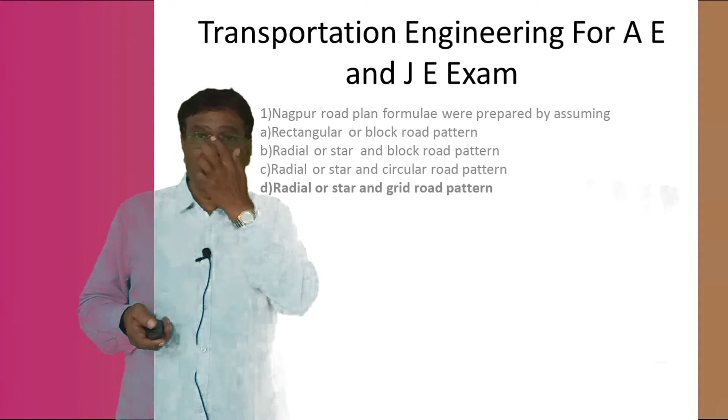I got total teaching experience of about 36 years, and for this whole period I have taught transportation engineering. My specialization is MTech transportation engineering from NIT, National Institute of Technology, Tiruchirappalli, Tamil Nadu. I am not praising myself, but I am very expert in this subject. You can ask any questions from any angle in transportation engineering.

My boys, don't be scared that it is only objective type. My questions and answers are not only telling the right answer, but side by side I am going to give you the concept, why this is the right answer. For example, in question number 1, why D is the right answer, why not A, B, C. With that I am going to give you the whole concept of

transport engineering, so that if any other questions are asked in this particular subject, you should be able to answer. Okay, let's go.

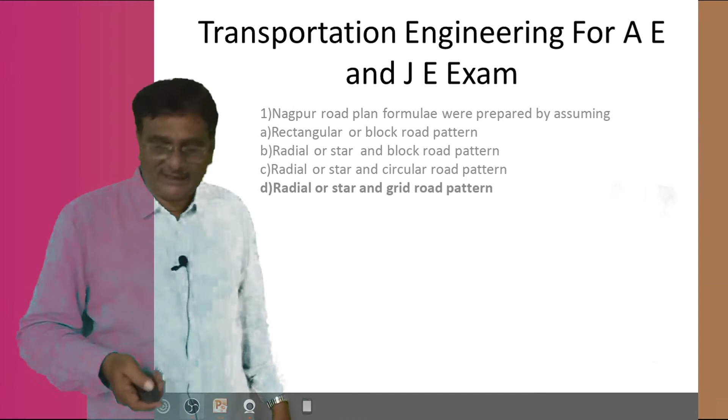There are 4 answers, 1, 2, 3, 4. They are all different road patterns, my boys. Now he is asking which pattern is used in the Nagpur road plan formula. Answer D is the right answer, the radial or star and grid pattern is used in the Nagpur road plan formula. Coming to the next.

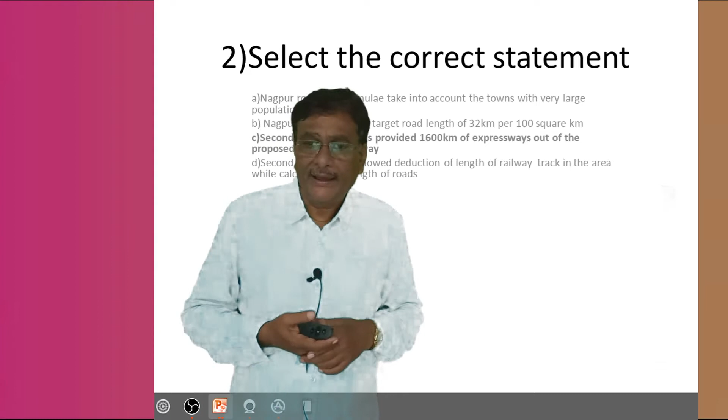Now coming to the second question. Nagpur road plan formulae take into account the towns with very large population. Understand or not? The question is very simple, try to read. Now there are 4 statements. Among the 4, which is the right statement?

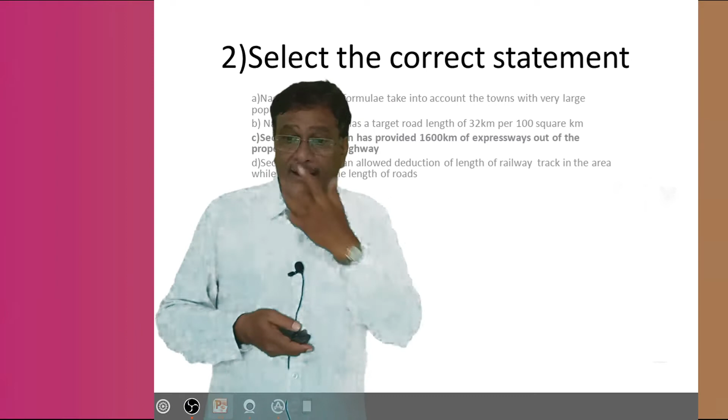There are 4 statements given, A, B, C, D. Which statement is correct? I read the 4 statements. A: Nagpur road plan formulae take into account the towns with a large population. B: the Nagpur road plan has a target road length of 32 kilometers per 100 square kilometers. C: the second 20-year plan has provided 1,600 kilometers of expressways out of the proposed national highways.

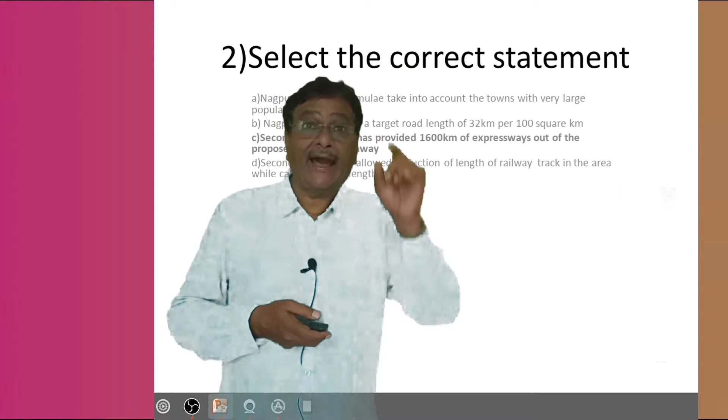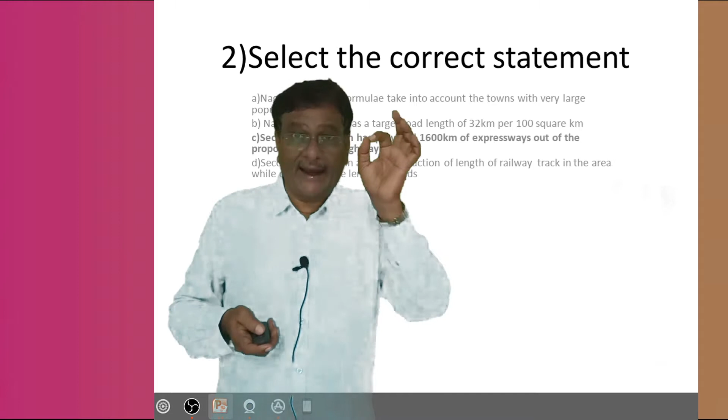If you look into the second 20-year plan, which is called the Bombay Road Plan, the second 20-year road plan has added 1,600 kilometers of expressway out of the proposed national highways.

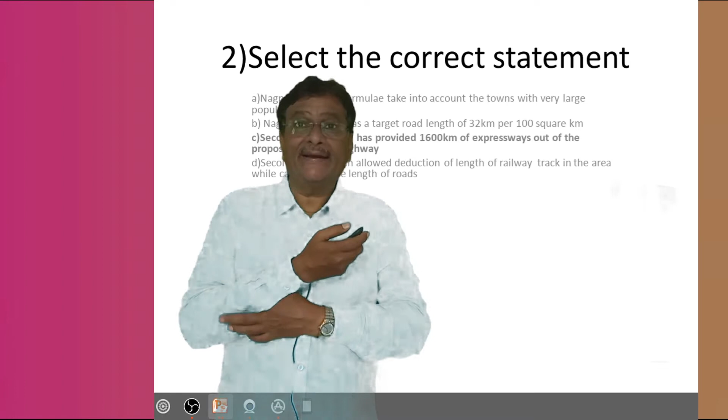So national highways, state highways, major district roads, other district roads, village roads, everything is there. But in addition to these 5 roads, the second 20-year plan has added 1,600 kilometers of expressways.

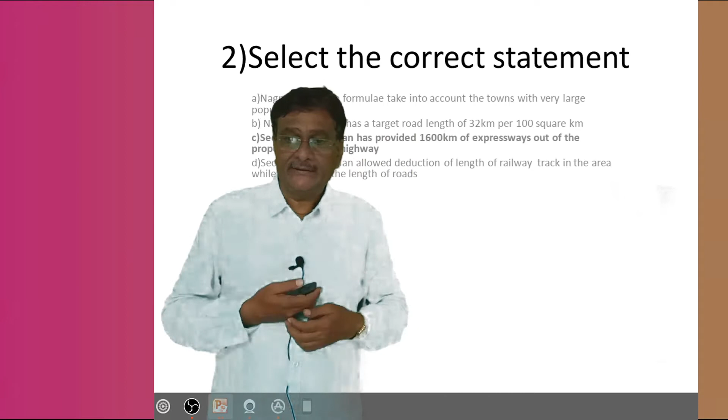Okay, the right answer is C. The correct statement among the 4 is: the second 20-year plan has provided 1,600 kilometers of expressways out of the proposed national highways.

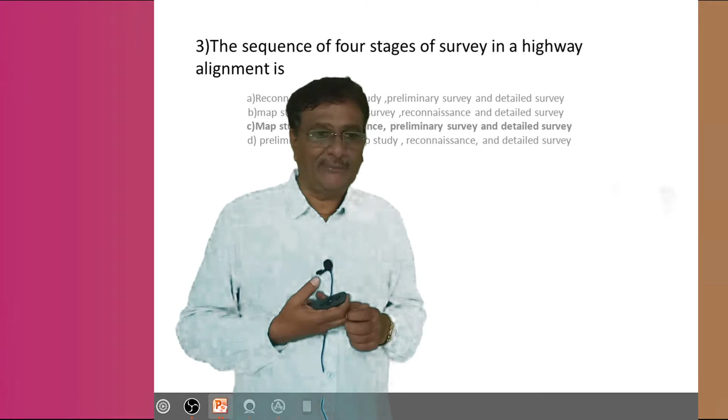Okay, coming next, third: the sequence of the 4 stages of the survey in a highway alignment. So there are 4 types of surveys, my boys. Engineering surveys, they call them. There are 4 types of surveys which are done for the highway alignment; they are also called the 4 stages of surveys. Which is the correct sequence?

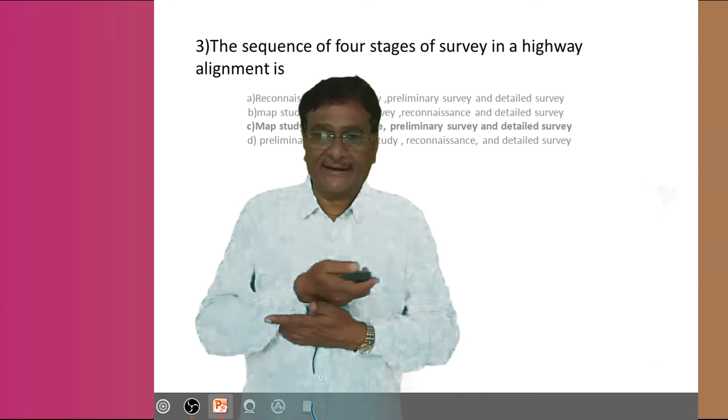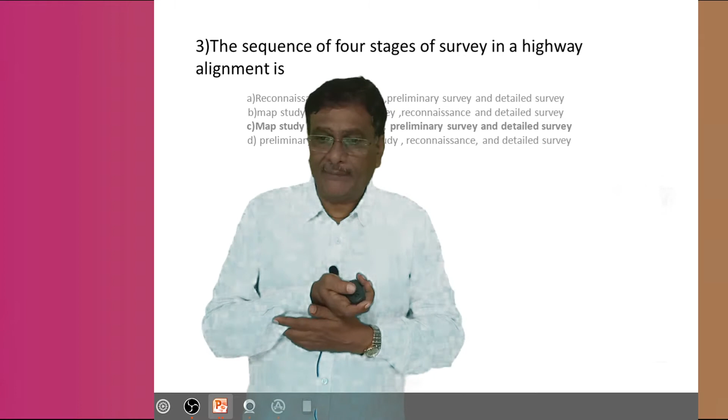The first option is reconnaissance survey, map study, preliminary survey and detailed survey. Second is map study, preliminary survey, reconnaissance survey and detailed survey. The third is map study, reconnaissance survey, preliminary survey and detailed survey. And the last one, preliminary survey, map study, reconnaissance survey and detailed survey. My boys, the answer is the third. C is the right answer.

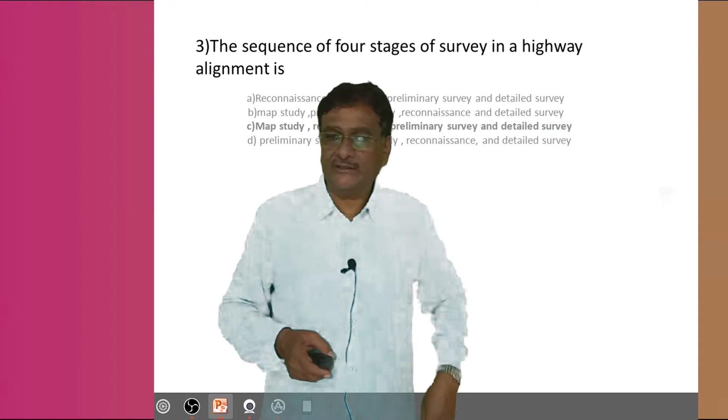The different stages of surveying are in sequential order. Engineering surveys are, again I repeat: first is map study, second is reconnaissance survey, third is preliminary survey and the last one is the detailed survey. The sequence of the 4 stages of the survey in a highway alignment is map study, reconnaissance survey, preliminary survey and detailed survey. Answer C. Okay, my boys, going to the next one, the 4th.

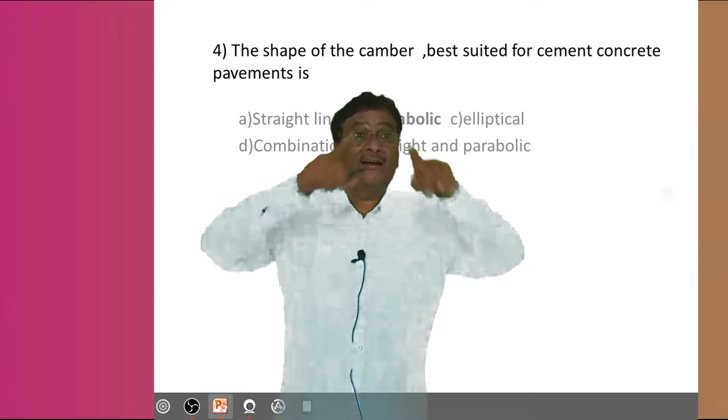So, the shape of the camber best suited for cement concrete pavement. My boys, once again I am telling you what the camber is. The camber is a transverse slope given to the pavement surface, in the transverse direction of the pavement or road. The 4 options given: straight line camber, parabolic camber, elliptical camber, and a combination of straight and parabolic.

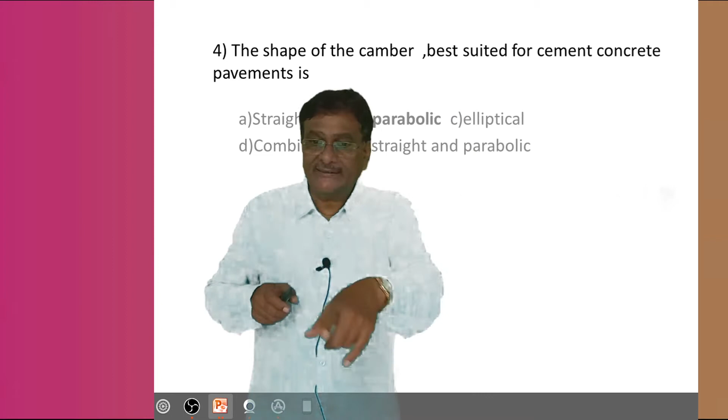The answer here is parabolic camber. Parabolic camber is the shape of the camber best suited for cement concrete pavement. The right answer is B.

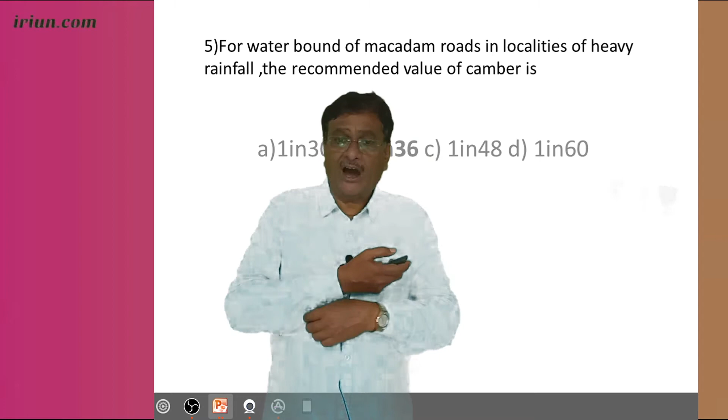Coming to the next. Water bound macadam roads, I think you have studied already, are usually called WBM roads. For WBM roads in localities of heavy rainfall, the recommended value of camber, that is the transverse slope of the road, is asked.

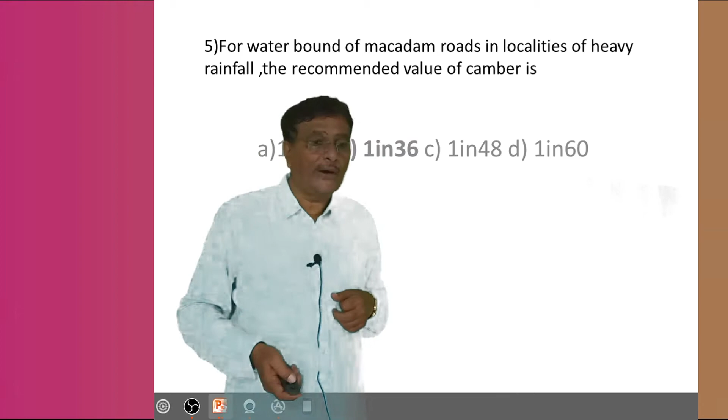4 options are there, my boys: 1 in 30, 1 in 36, 1 in 48, 1 in 60. The right answer is B, 1 in 36. The cross slope or camber value is 1 in 36 for a WBM road in localities of heavy rainfall. Answer B. Coming to the next, my boys.

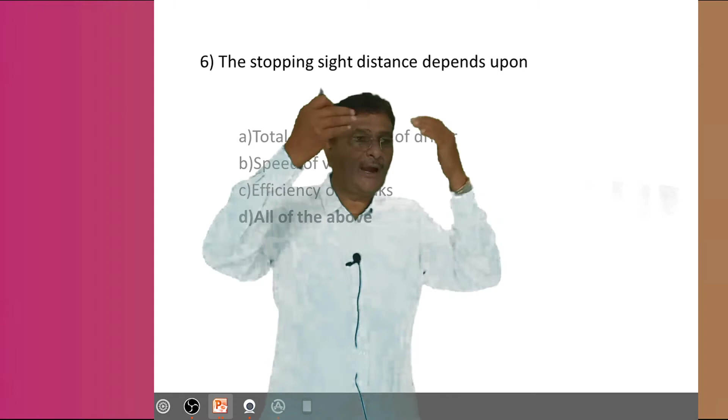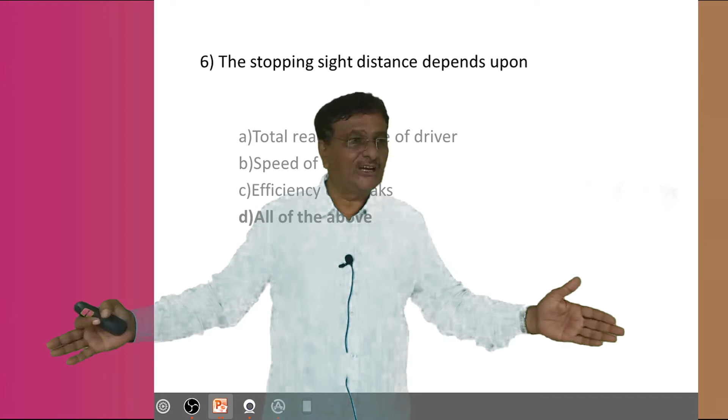The stopping sight distance depends upon... before that, let me tell you the definition of stopping sight distance. The stopping sight distance, or SSD, is the minimum distance required by the driver to bring his vehicle to a dead stop after seeing the object.

Understand or not? Now he is asking: the stopping sight distance depends upon what? Again, 4 answers are there. Total reaction time of the driver, second is speed of the vehicle, efficiency of the brake, and fourth, answer D, is all of the above. My boys, answer is D, the last one, all of the above.

Now I am going to tag up the question with the answer. The stopping sight distance depends upon total reaction time of the driver, also speed of the vehicle, also efficiency of the brakes. It means the stopping sight distance depends upon all the 3 parameters: total reaction time of the driver, speed of the vehicle, and efficiency of the brake. So the answer is all of the above.

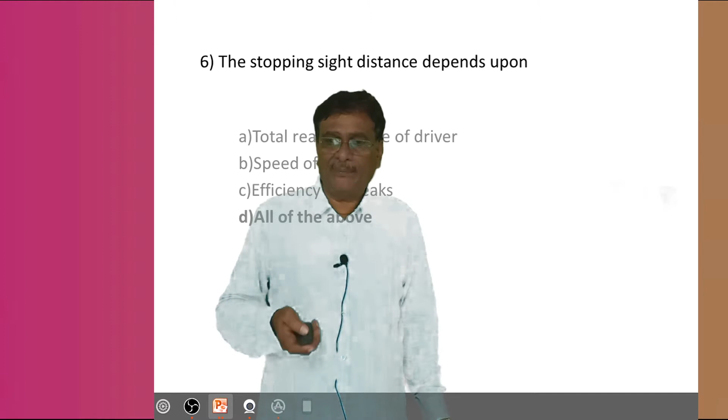All of the above. So as I told you, SSD depends upon all of the above. The answer is D. That is, it depends upon total reaction time of the driver, speed of the vehicle, efficiency of the brake. Next, go to the next.

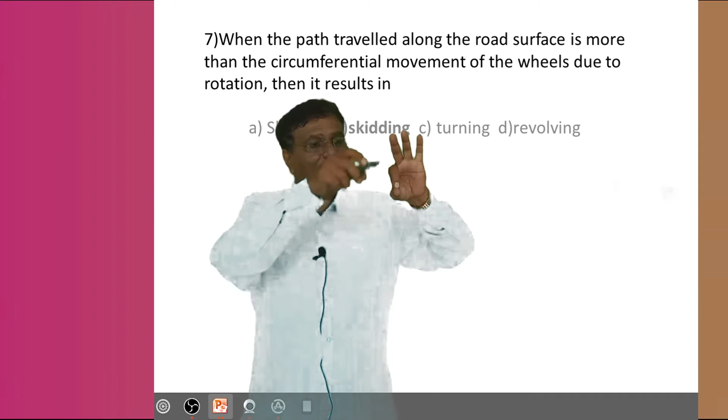When the path travelled along the road surface is more than the circumferential movement of the wheels due to rotation. You can understand that? Circumferential rotation of the wheel. If the wheel makes one rotation, that is called one rotation of the wheel, the circumferential rotation. When the path travelled along the road surface is more than one circumferential movement of the wheel due to the rotation, it results in what?

So again 4 answers are there. One is slipping, second is skidding, third is turning, and fourth is revolving. Understand or not? I am telling you, answer is B, skid. When the path travelled along the road surface is more than the circumferential movement of the wheel due to the rotation, then the vehicle is going to skid, correct or not?

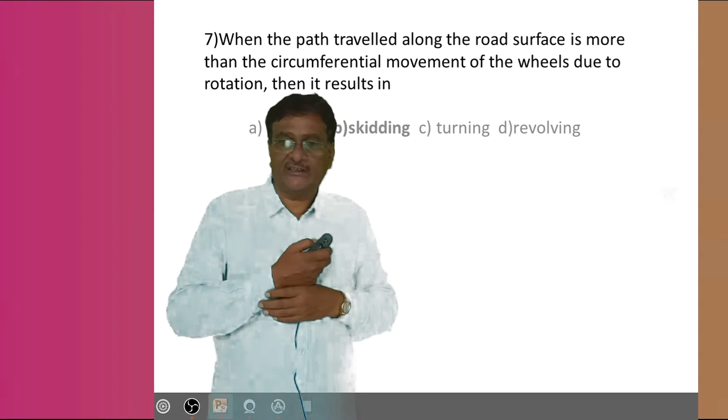The vehicle is going to skid when the path travelled along the road surface is more than the circumferential movement of the wheels due to the rotation. Answer is B, skidding, correct or not? It is skidding. Go to the next.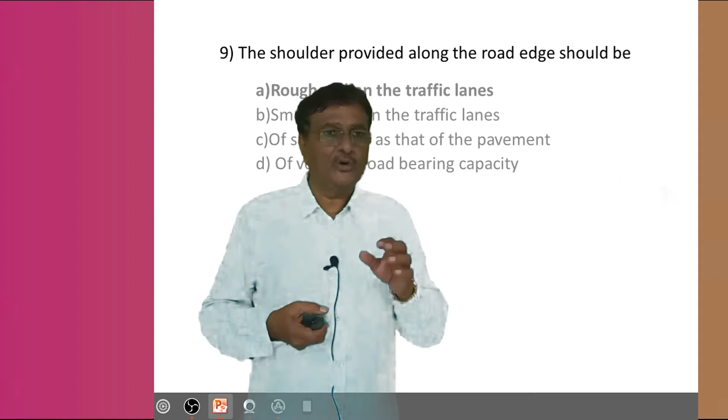Shoulder is an extra width provided on both sides of the roadway or the pavement. Now, what is the question? The shoulder provided along the road edge should be what? 4 statements are there. The shoulder you provide along the edge of the road, how should it be?

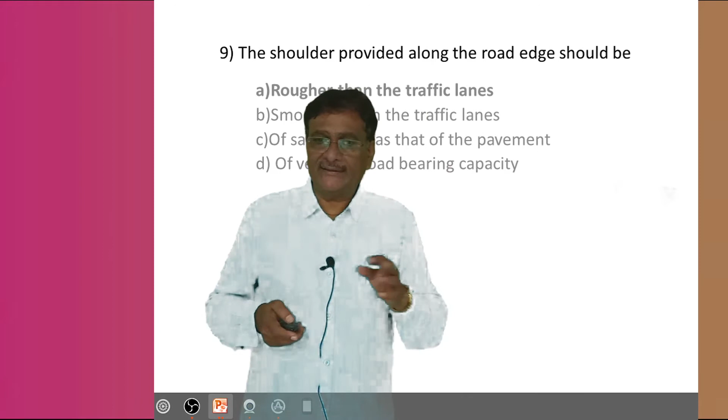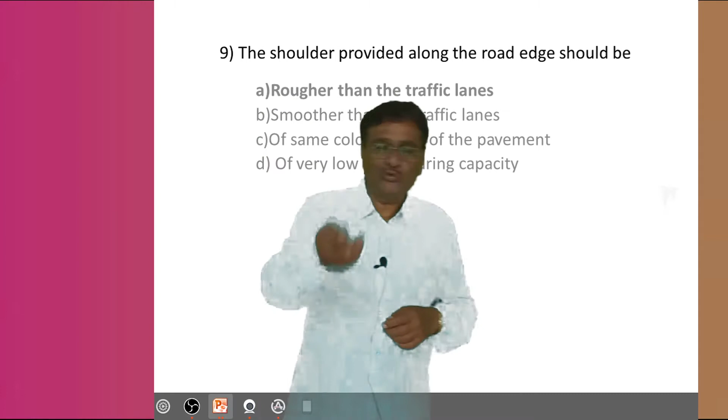Again, there are 4 options: rougher than the traffic lane, smoother than the traffic lane, of same color as the pavement, or of very low load bearing capacity. My boys, the answer is 1, rougher than the traffic lane.

You must have observed along the road surface there is a shoulder provided on both sides, immediately after the edge of the road. The shoulder surface will always be rough, rougher than the traffic lane or main pavement. So the shoulder provided along the road edge should be, answer number 1, A, rougher than the traffic lane. Coming to the next, camber in the road is provided.

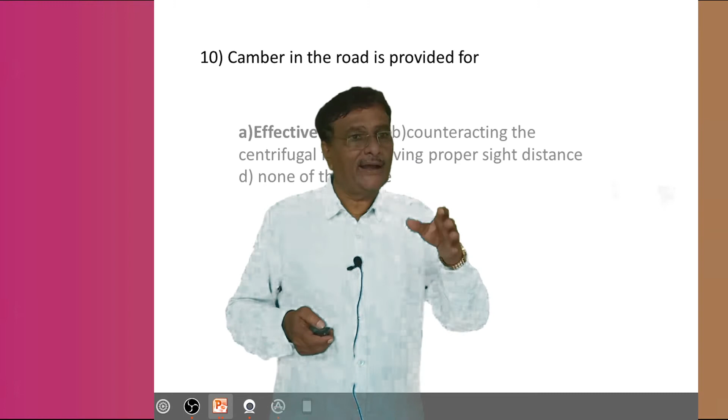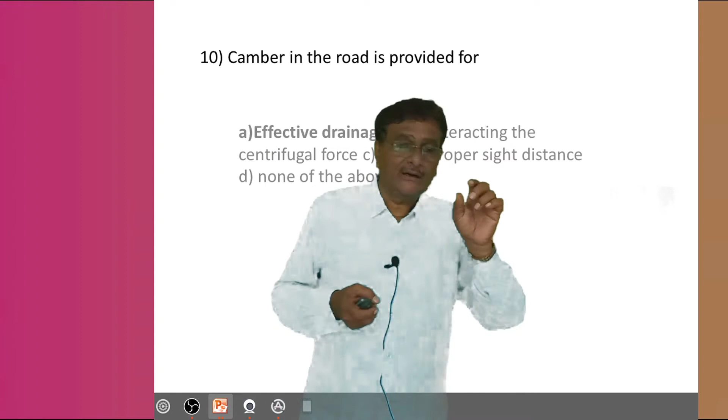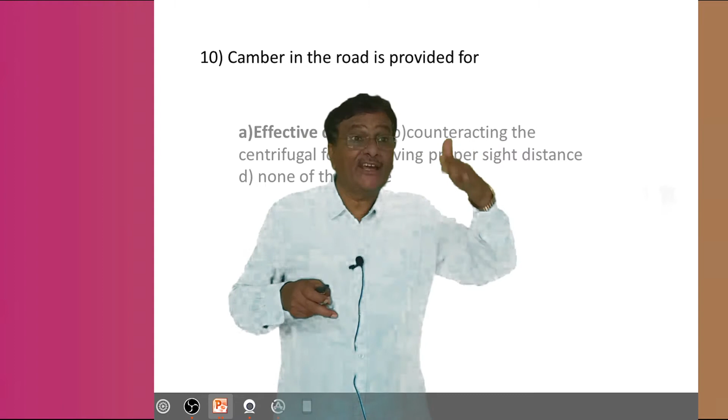Camber in the road is provided as the transverse slope. I repeat the question, I am going to tell the concept of camber. Cambers are the transverse slope provided in the transverse direction of the pavement to drain off the rainwater. During rainwater, these cambers will help in draining off the rainwater. Now the question they are asking.

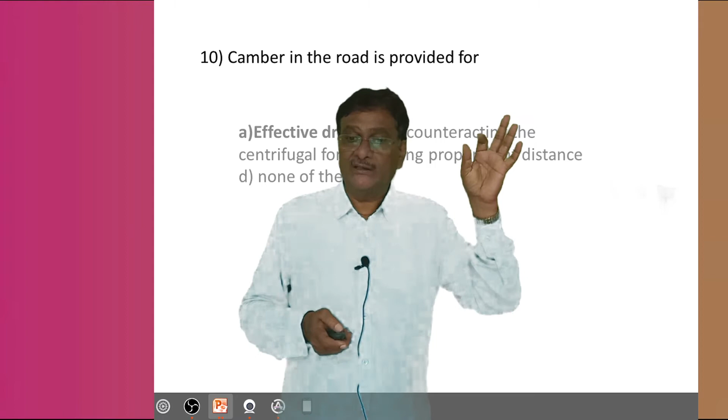Camber in the road is provided for: 1, effective drainage; B, counteracting the centrifugal force; C, having proper sight distance; D, none of the above. The right answer is A, effective drainage. As I told you, camber is that particular slope provided in the transverse direction of the road, always provided to drain off the rainwater, the effective drainage. Answer A is correct, effective drainage.

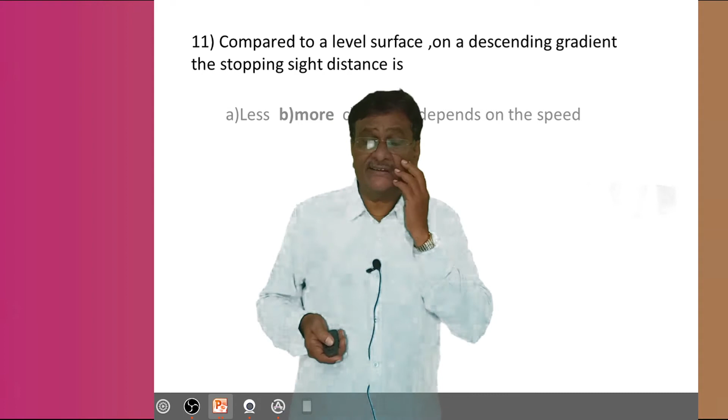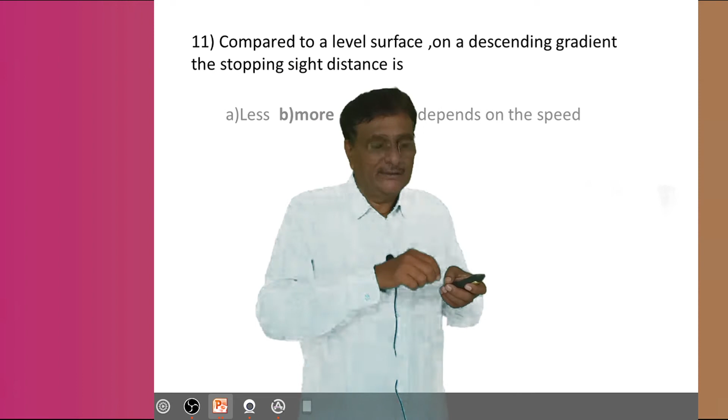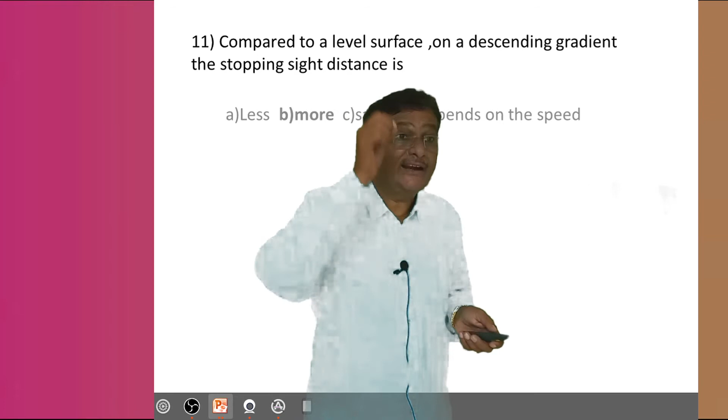The rate of rise or fall given to the center line of the road is known as the gradient. If the center line rises in the direction of movement of the vehicle, it is known as a rising gradient. If the center line falls in the direction of movement of the vehicle, it is known as a falling gradient. So there are two gradients: rising gradient and falling gradient.

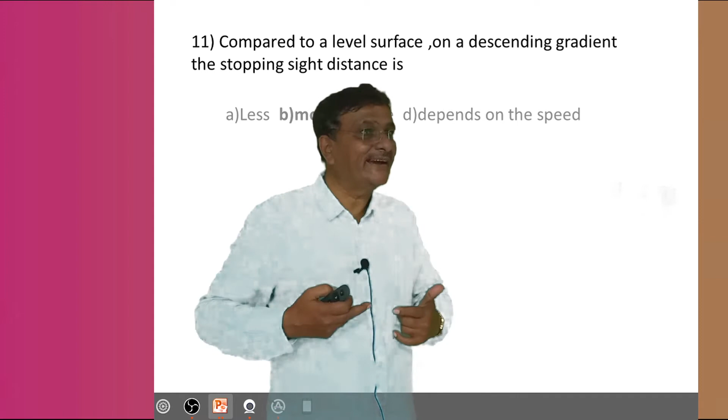Now, when going on an uphill or rising gradient, the stopping sight distance, the distance required by the driver to stop the vehicle, will always be lesser, because the ground is already rising. But more stopping sight distance is required when on a descending gradient. When going on a descending or falling gradient, the stopping sight distance required will be more.

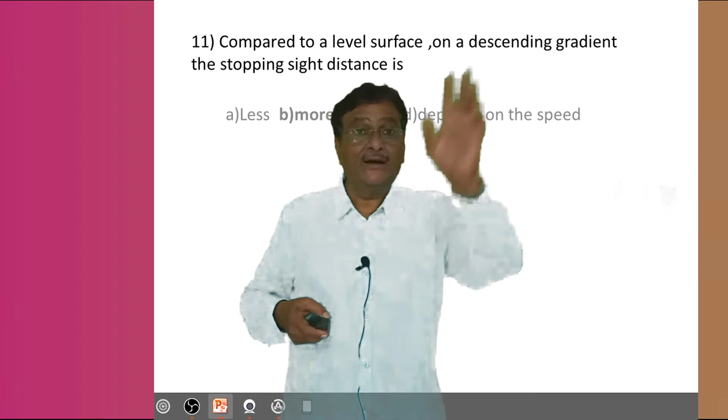There is a question asked here: compared to the level surface, on a descending gradient or falling gradient, the stopping sight distance is: 1, less; 2, more; 3, same; 4, depends on the speed. The right answer is more. More stopping sight distance is required on a descending gradient.

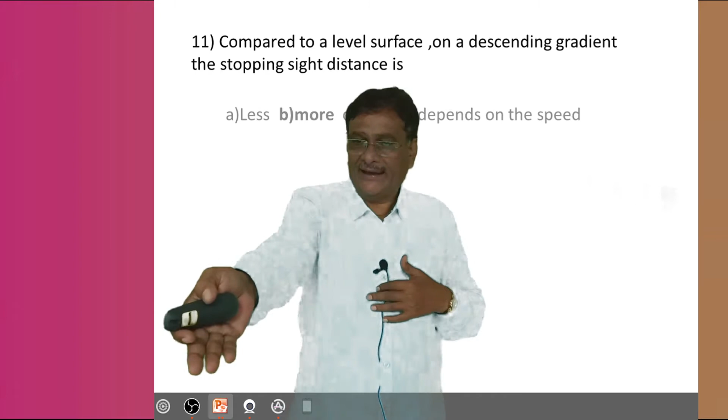I will tag up the question with the answer. Compared to the level surface, on a descending gradient or falling gradient, the stopping sight distance required is, answer B, that is more. More stopping sight distance is required. Answer is B, more. Next, we will move to the next question. I think you are all understanding it.

I am not going very fast, but I am very slow also, I think, in fact. No problem, anyhow, I want you to understand the concept.

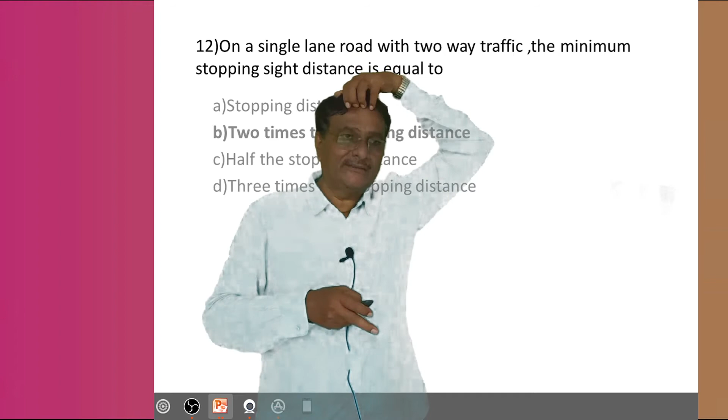Any questions posed in this direction, highways, transport engineering, you should be able to answer. The teacher's duty is not only to give the right answer for a particular question, but he should know and tell why this is the right answer. You should give the concept of the subject so that any particular question in this pattern can be answered. That's why I'm not only giving the right answer for objective type questions, but elaborately telling you why this particular answer is the right answer. That is my vision, my concern about you people.

But if you ask me what is the width of the single lane in a multiple road complex, where is the multiple road? Single lane expressway - if you ask me, there is a 3+3 lane expressway between Mumbai and Pune, where 3 lane in one direction, 3 lane in another direction, 3+3, 6 lanes are there. Then if you ask me what is the width of each lane, the width of each lane is 3.5 meter.

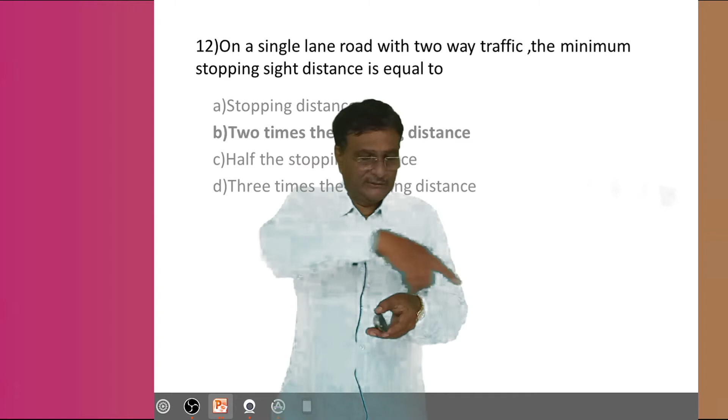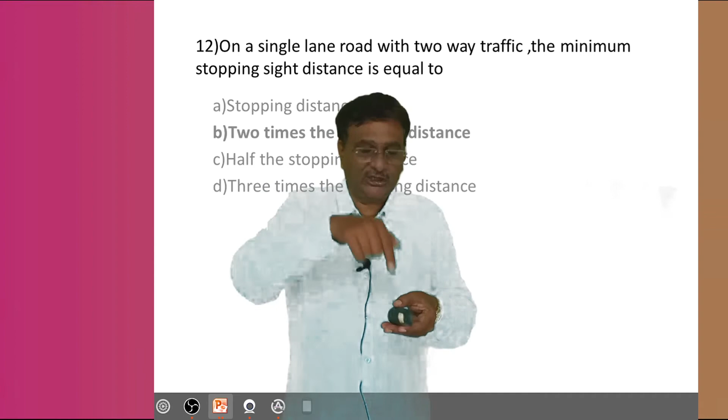How exactly? You see, on the single lane road, both vehicles are going in opposite directions. One vehicle is going in one direction, another vehicle is moving in the opposite direction. Both are going. Then if both vehicles have to stop at this point, one stopping sight distance is required for one vehicle, and another stopping sight distance is required for the oncoming vehicle. So the stopping sight distance required in a single lane road having two-way traffic will be 2 times the stopping sight distance - one here, another for the other direction. So on a single lane road with two-way traffic, the minimum stopping sight distance is equal to, answer is B, 2 times the stopping sight distance.

How is it 2 times? I just now told you - it is 2 times the stopping sight distance.

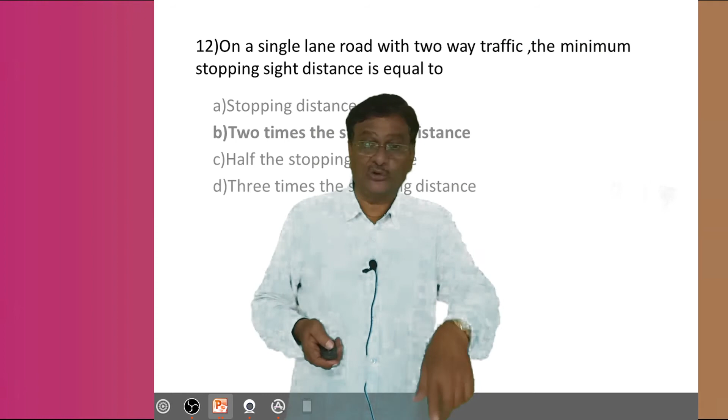Coming next, the desirable length of overtaking zone as per IRC recommendations is equal to. Now again I have to tell you what is overtaking sight distance. I defined stopping sight distance just now. Now I am going to define the overtaking sight distance. Leaving aside the question and answer, I will tell you now - what is the overtaking sight distance? Overtaking sight distance is a distance required by the fast moving vehicle to overtake.

Let me define it in a more precise way. The overtaking sight distance is the distance required by the fast moving vehicle to overtake the slow moving vehicle without colliding with the vehicle coming from the opposite direction. I repeat once again - the distance required by the fast moving vehicle to overtake the slow moving vehicle without colliding with the vehicle coming from the opposite direction. This distance, OSD, equals small d1, small d2, small d3. So this distance is the distance required by the driver, or the fast moving vehicle, to overtake the slow moving vehicle.

At the same time, the vehicle that is overtaking should not collide with the vehicle coming from the opposite direction. Now he is asking the question about the desirable length of the overtaking zone, what is the minimum length of the overtaking zone.

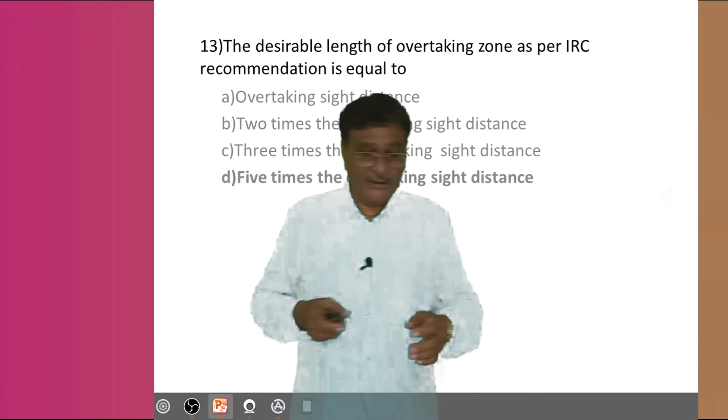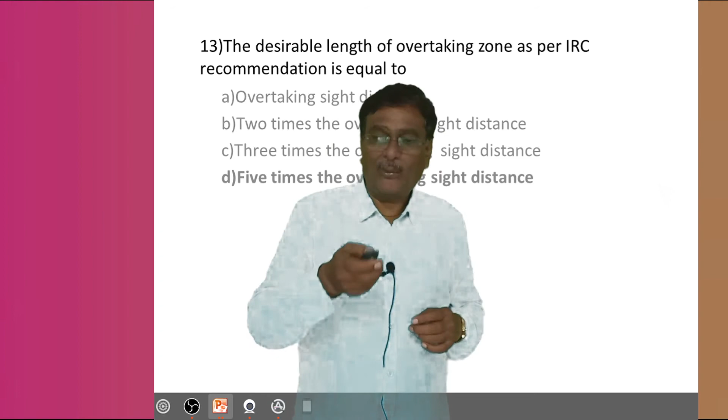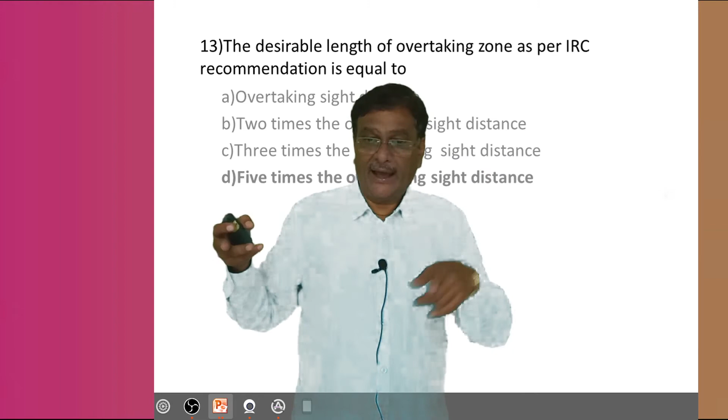That is the provided minimum overtaking distance, minimum safe overtaking sight distance. The safe overtaking distance provided on the road will be 3 times the OSD, and the desirable overtaking sight distance is always the right answer, the fourth one, that is 5 times the overtaking sight distance. Therefore, the desirable length of the overtaking zone as per IRC recommendation is equal to answer D, 5 times the overtaking sight distance.

Coming next, stopping sight distance is always SSD, right? What is that? Four answers are there: it is less than overtaking sight distance, more than overtaking sight distance, or D, none of the above.

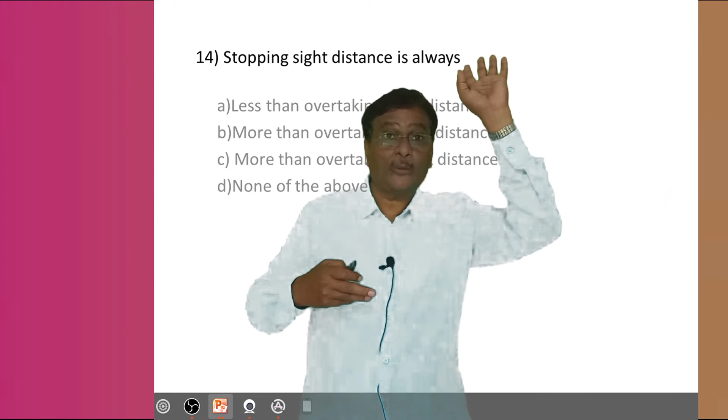My boys, stopping sight distance, answer is A. Stopping sight distance is always less than overtaking sight distance. No doubt in that. Overtaking sight distance is always more than the stopping sight distance. Therefore, the answer is A, it is always less than overtaking sight distance.

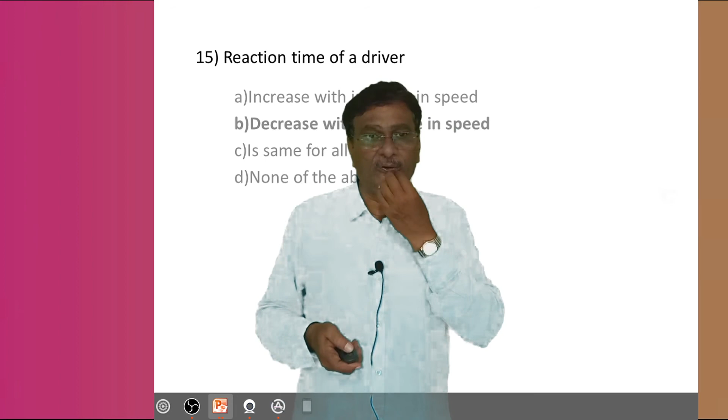Coming next, reaction time of the driver. According to IRC, it is equal to T equal to 2.5 seconds for the stopping sight distance, and 2.0 seconds for the overtaking sight distance. This is what the Indian Roads Congress says.

Now the question is asked about reaction time of the driver, four answers are there: increases with increase in speed, decreases with increase in speed, same for all speed, or none of the above. My answer is, reaction time of the driver always decreases with increase in speed. When the vehicle is going at very high speed, the driver requires less reaction time.

That's why we use 2.5 and 2 seconds. Because the rate of change of velocity is acceleration, the fast moving vehicle will accelerate and overtake the slow moving vehicle. That's why the reaction time of the driver always decreases with increase in speed. When the speed increases, the reaction time of the driver decreases.

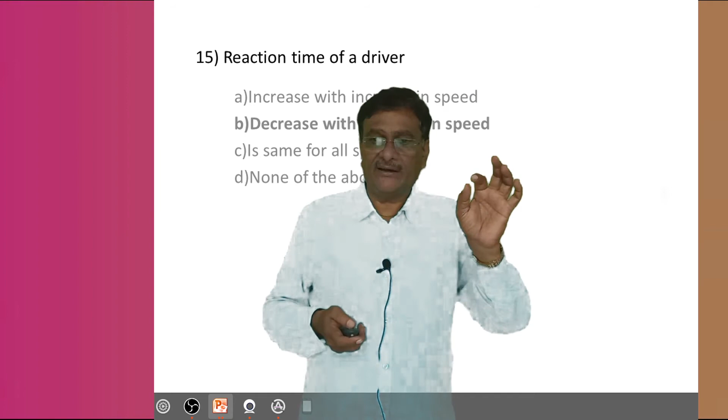So for this question, the answer is B, the reaction time of the driver decreases with increase in speed.

Coming to the next question: if the stopping sight distance is 60 meters, then the minimum stopping sight distance for two-way traffic is? If the stopping sight distance is 60 meters already given, for a two-way road, previously I told you it was a single lane two-way road, now it is a two-lane two-way road. Then the minimum stopping sight distance is how much? Only 60 meters, as given.

Then what is the minimum stopping sight distance? It is 60 meters, because it is already a two-lane road for two-way traffic. If it is the case for two-way traffic, the stopping sight distance is only 60 meters as given, then the minimum stopping sight distance is also only 60 meters.

Okay, it is 60 meter only, understand or not? Okay. If the stopping sight distance is 60 meter, then what is the minimum stopping sight distance for two-way traffic? Again it is 60 meter only. 60 meter is given and minimum stopping sight distance is also 60. Answer is B, 60 meter.

Next, the effect of grade on the safe overtaking sight distance. Grade or gradient, both are the same word. The effect of the grade on safe overtaking sight distance is, understand or not? 4 answers are there, my boys. I am going to read. To increase it on a descending gradient and to decrease it on an ascending gradient.

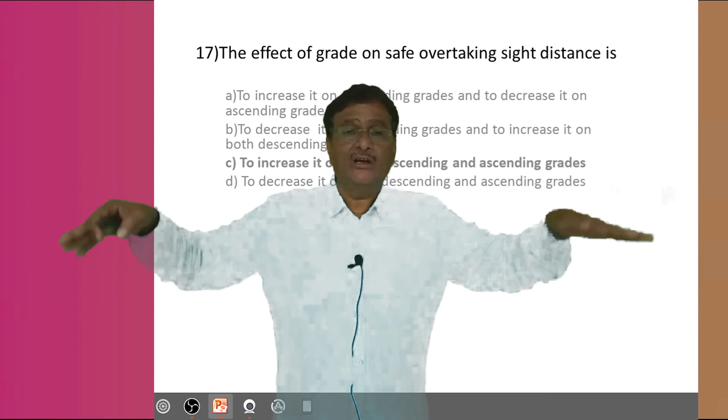The effect of the gradient for the safe overtaking sight distance will be always to increase it on both ascending and descending gradient. Understand or not? Whatever the gradient given, ascending slope or descending slope, you should always increase it. The slope on both sides, both descending and ascending gradient, should always be increased whenever the safe overtaking sight distance is being calculated.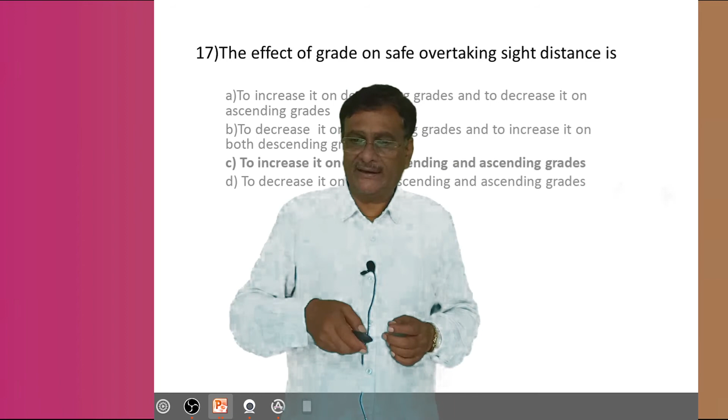I club the answer with the question: the effect of the gradient on safe overtaking sight distance is answer C, it will always increase it on both descending and ascending gradient. So, it will have effect on both ascending and descending gradient. The safe overtaking sight distance is increased on both sides. Coming to the next.

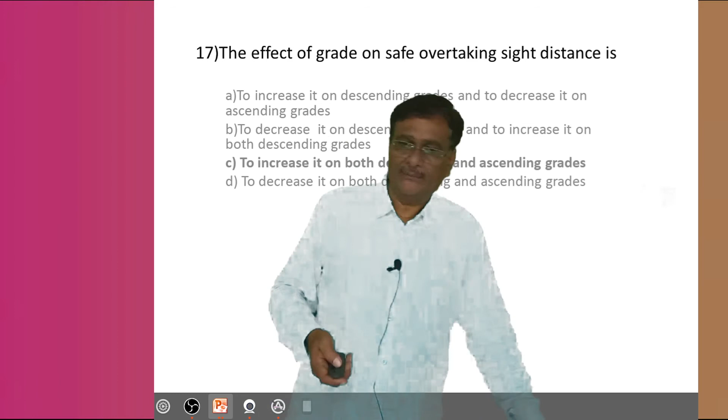Now, the ruling design speed on a national highway in a plain terrain, as per IRC recommendation. So, my boys, again there are 4 different types of roads, again ruling speed, correct or not? Here ruling speed is the plain road, understand or not? What could be the speed on the national highway?

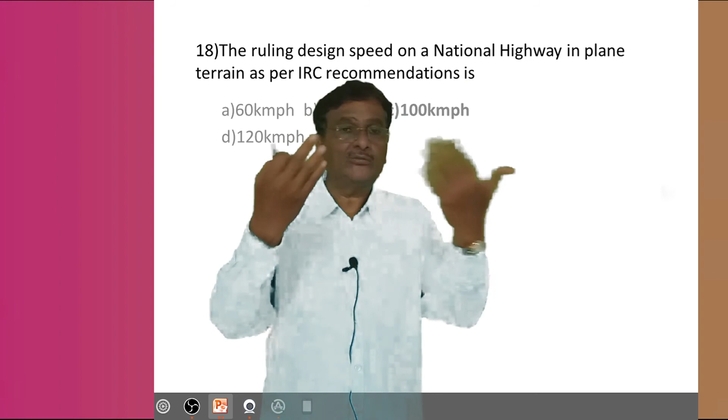But the ruling speed means on the national highway, very important, national highway 2-lane 2-way traffic or 4-lane 4-way traffic, or 6-way traffic, understand or not? Then he is asking the ruling design speed on a national highway in a plain terrain, road is very straight, no undulation, as per the IRC recommendation.

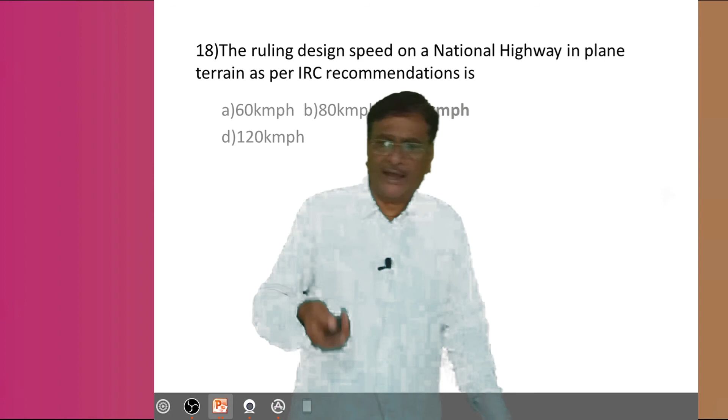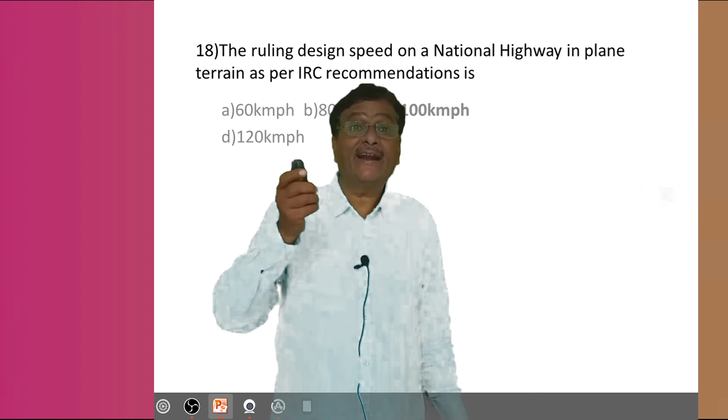He has given 4 speeds, 60 km per hour, 80 km per hour, 100 km per hour, 120 km per hour. As per the IRC, answer is C, 100 km per hour. 100 km per hour is the ruling design speed on a national highway in a plain terrain as per the IRC recommendation.

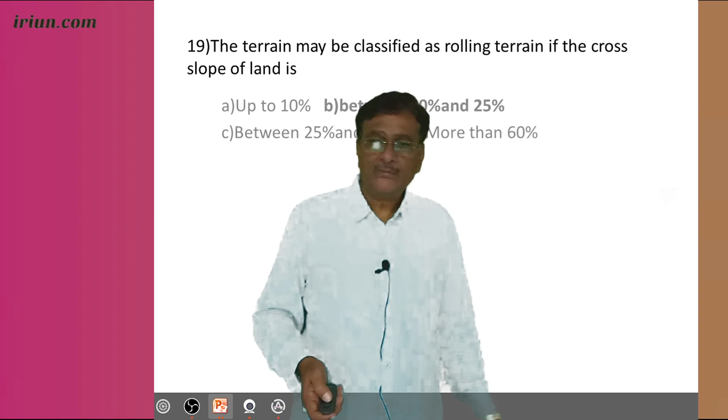Coming next, the terrain may be classified as rolling terrain if the cross slope is how much? There I told you, there are 4 types. Rolling terrain, mountainous terrain, all the different terrains are there. The terrain may be classified as rolling terrain if the cross slope is how much?

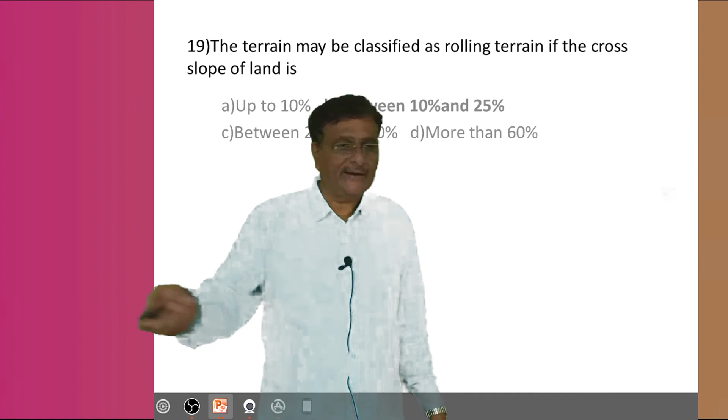Again there are 4 answers: up to 10%, between 10 to 25%, between 25 to 60%, or more than 60%. The right answer is B, between 10 to 25% is the cross slope given to the terrain known as rolling terrain. I repeat, rolling terrain cross slope is between 10 to 25%. Answer B is the answer. Okay. Coming next.

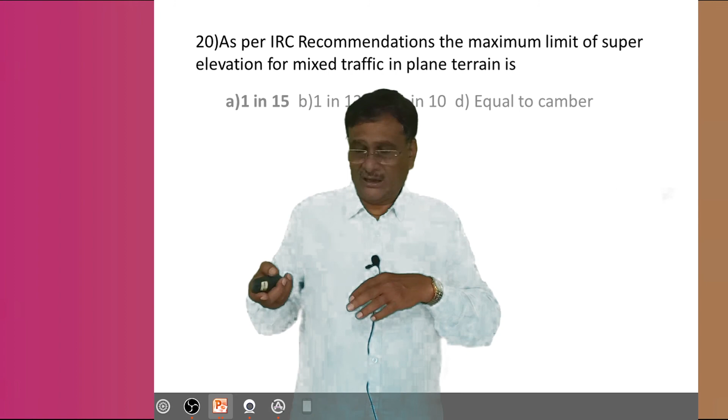Why this rising of the outer edge with respect to the inner edge, or with respect to the center line? It is being provided to compensate or to counteract the centrifugal force, correct or not? To counteract the centrifugal force by rising of this outer edge, you are going to introduce centripetal force. This centripetal force, which is provided as a super elevation, is going to counteract the centrifugal force.

Now the question: as per the IRC recommendation, the maximum limit of super elevation, correct or not? What is the rising of this outer edge to the inner edge or to the center line? Our Indian roads are all mixed traffic condition. As per IRC recommendation, the maximum limit of super elevation for mixed traffic in plain terrain is how much? There are 4 options, my boys.

Answer A is 1 in 15, answer B is 1 in 12.5, answer C is 1 in 10, and the last answer D is equal to camber. My boys, the answer is A, 1 in 15. Understand or not? The standard super elevation is 7%, or 0.07. The maximum super elevation provided for the mixed traffic condition is 7%, or 0.07.